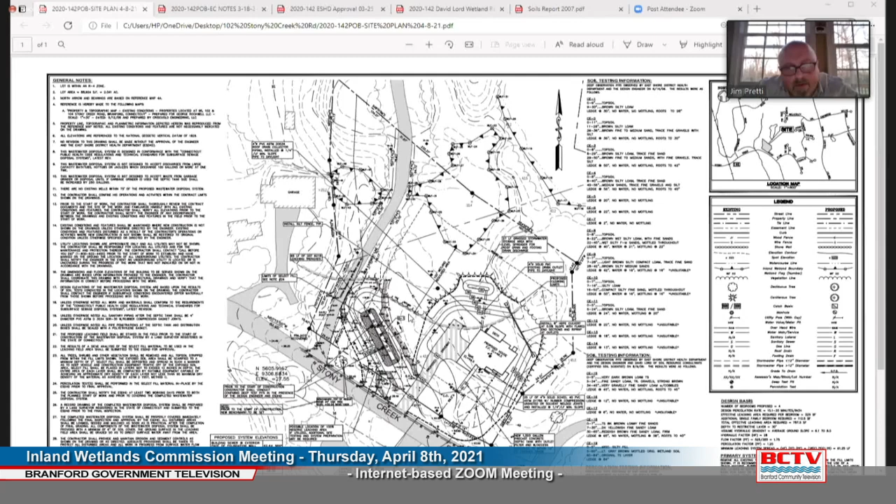The plan does show a stockpile topsoil area, a stormwater storage area with a level spreader for roof and footing drain discharge on the front of the house, basically on the other side of the ridge that goes through here.

We do have a septic tank and a leaching system for the proposed house, which has already been approved by East Shore Health Department at this point.

Jamie had emailed me that there had been a delineation on the neighboring property to the east, back in 2005, indicating there might have been wetlands in this area. That wasn't in our report from David Lord done years ago, so I had David go back out and check we didn't miss anything. I met him on site today, and we probed this whole area and found no indication of wetland soils there.

David was kind enough to jump on today. I saw him here a minute ago, and he could speak to this further if you wish, but we did double check and found no wetland soils in the area of the house. So that's where we are.

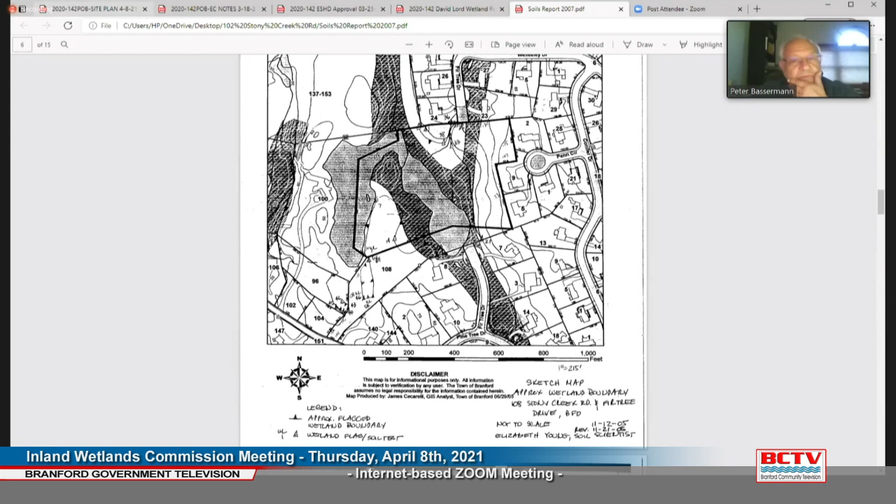Commissioner Bassermann: Where was the low-level area that you referred to? Right through here, I could show again on the site plan. On the site plan, please. Here it goes kind of right through the house. So because of the ledge, that's kind of both areas.

We're putting the house in between the ledge outcroppings to be able to get somewhat of a basement in there, and we're raising the house up because of the ledge and potential groundwater issues, so we're filling in between a little bit there. There was a comment from the town engineer about the possibility of ponding water over here because of our filling. I've indicated, just today, that we can add a culvert between the 2 lower areas, just to make sure anything possibly ponded up here can make its way around the house and back, eventually into this other lower wetland area.

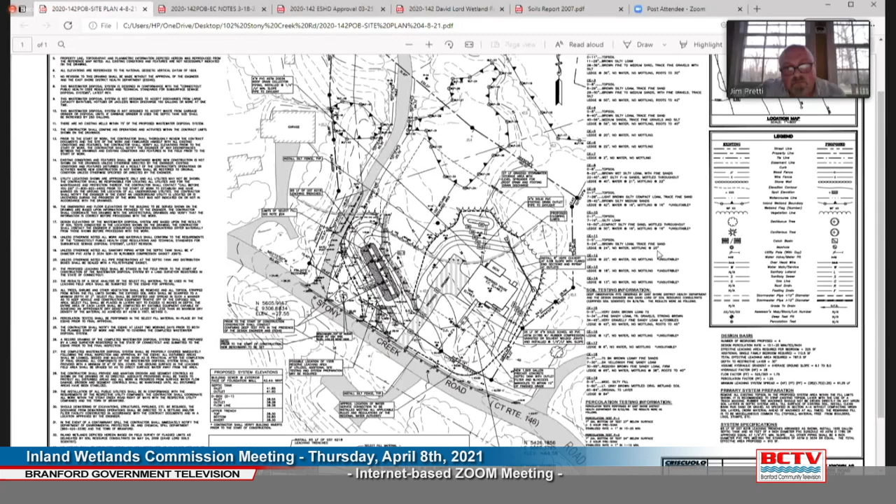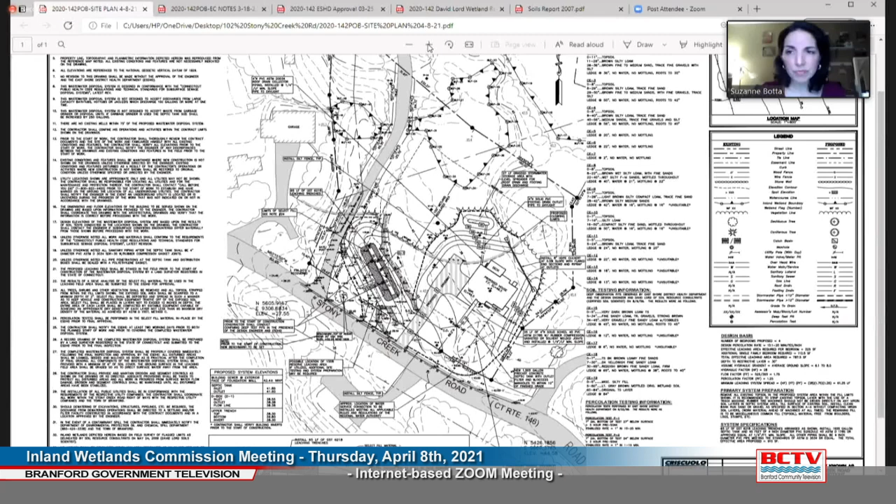Commissioner Botta: I just have a couple of questions for Mr. Pretti. It looks like the limit of disturbance is about 30 feet from the wetland flag, maybe flag 34 or so. Is that about 30 feet? Yes, I believe so. And what is the current degree of clearing on the property now?

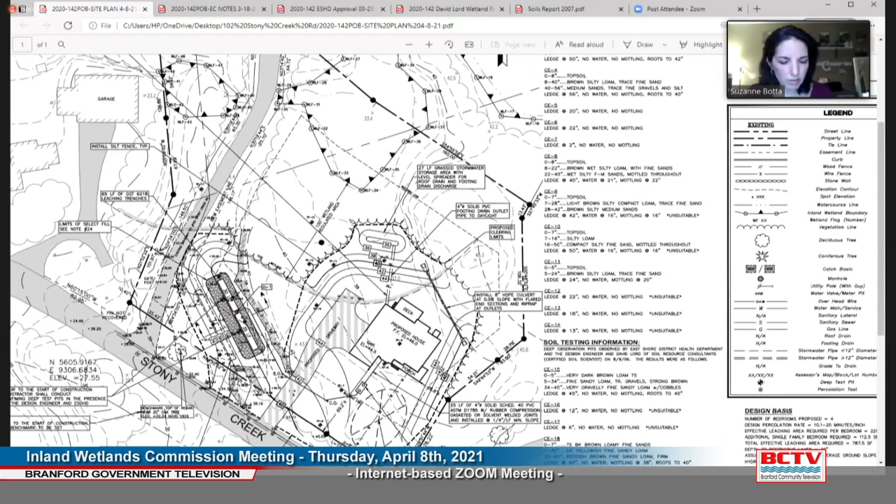The site is mostly wooded now. Although I will say, when David and I were out there today, the amount of dead and falling trees is tremendous. There seems to be some sort of termite or carpenter ant issue, with a lot of shredded stumps and down trees throughout this whole area.

Okay, so the site will need to be cleared. Is there much grading? Is there blasting? We're trying to do this without any blasting. That's why we've put the house in between the 2 ledge outcroppings, and we're filling up to the house.

So is there an intention, will you be stockpiling anywhere? They'll have to bring in material here. There won't be material to remove, they'll be bringing it and placing it as they go.

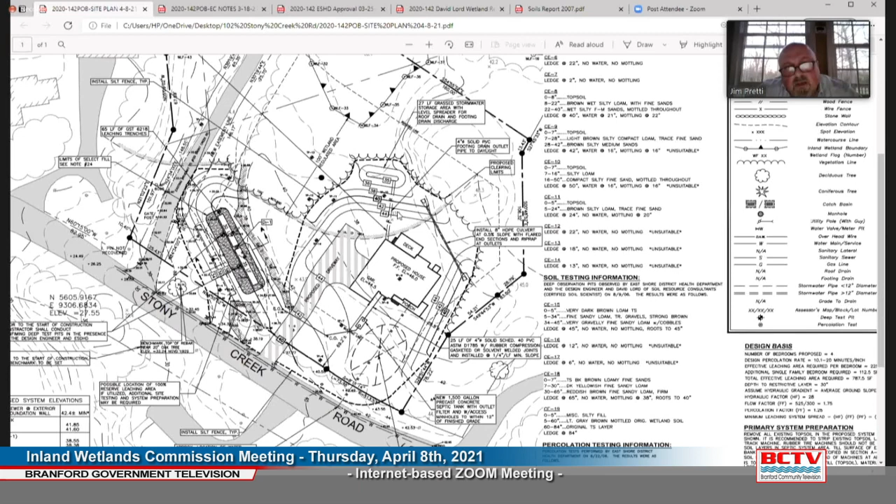And then, you talked about a potential concern, if they have a basement, is there potential need for a sump pump that's going to need to discharge? No, Jim Pretti again, this basement, just for round numbers, the footing drain around here will be roughly 37, and this outlet over here, the lip of this is at 36, it's a foot deep. So we could get out gravity wise without a pump, which seems to be a driving factor in Branford lately.

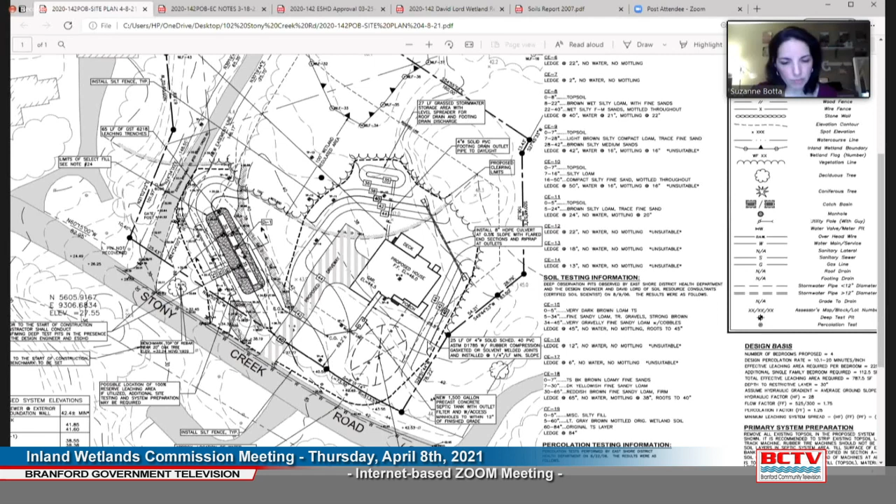Okay, and then what is this? The space behind is not a conservation area or anything like that, is it? It looks like, when you scaled out on the map, it looked like a larger wetland complex. This here is the edge of what was known as Vilmus Pond, and this was Marcus property that is quite large, actually. That's what this driveway goes to.

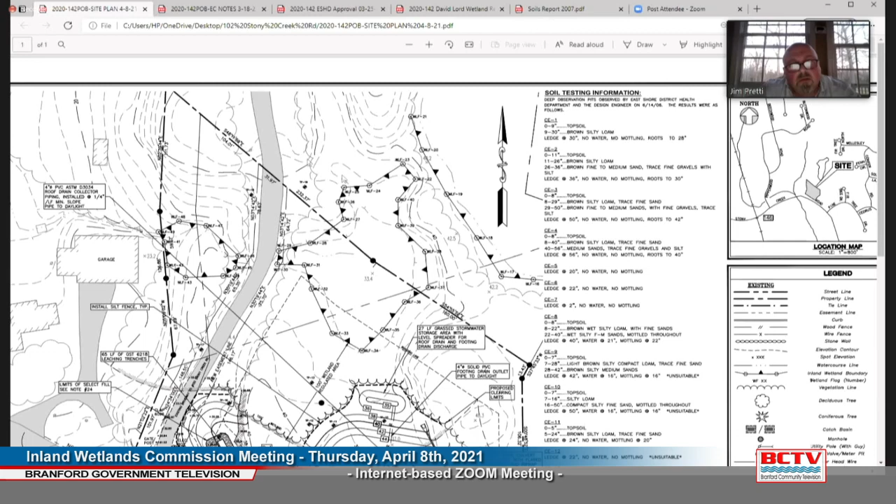So I'm wondering if it would be appropriate to put some markings at the limit of disturbance, indicating there shouldn't be clearing beyond that space. We know that creep is particularly common, and given that we're looking at 30 feet from the wetland, that would be an important feature to add. I could definitely say that I could make that call for the owner here, especially if we're talking about doing it around this side where the wetland is.

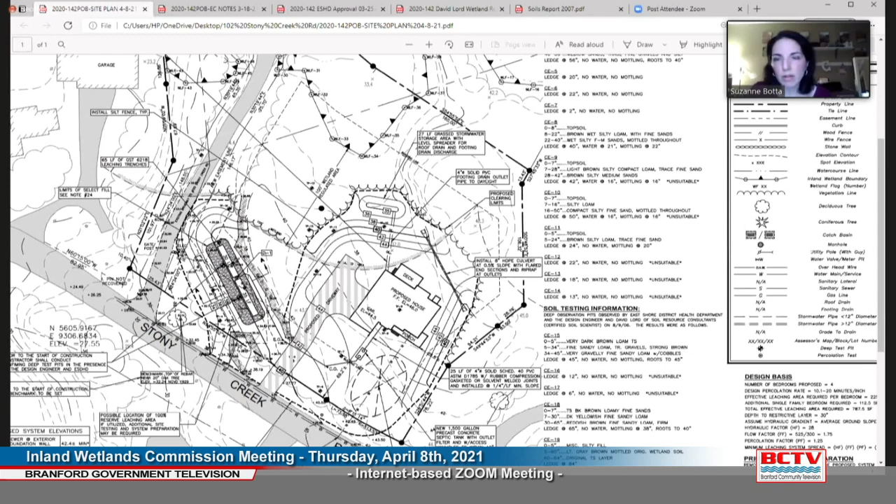I don't know that I could say we put them all the whole way here, but along this side. I agree, yeah, I think that's where we're looking at. Yes, the grass storage area, stormwater storage area. Yeah, with the level spreader, I think that would be an appropriate spot. It's close. Jim Pretti again, I think it's absolutely reasonable. Yes.

Jaymie Frederick, Wetland Agent.

I just wanted to add that in addition to the comment regarding the low spot, the town engineer also had a comment suggesting that the grass swale have some plantings due to the soil testing done on site and low infiltration levels. Just wanted to make the commission aware of that.

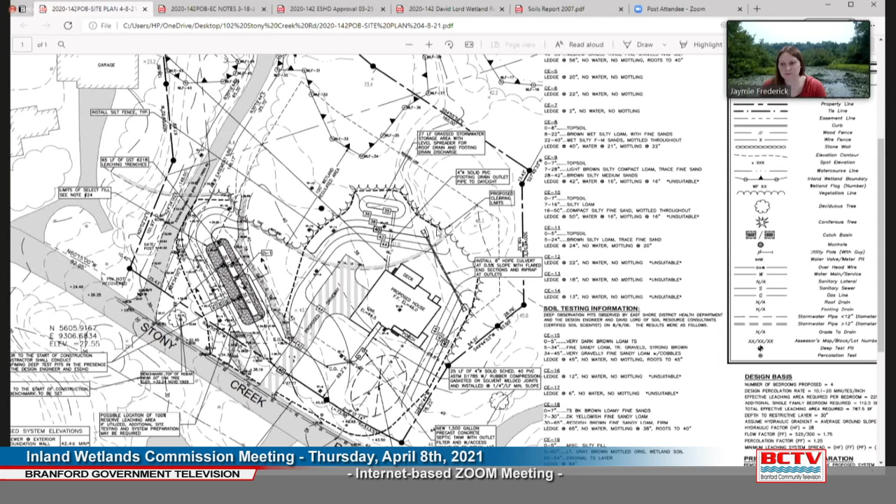Jim Pretti again. Jamie and I had a brief conversation about that today. What we could do is change this from a grass area to a rain garden. That would require excavating some of this material out and replacing it with a mix that has some compost in it, which will actually alleviate some of the infiltration constraints that the native soil has there right now. So we'd be willing to change that.

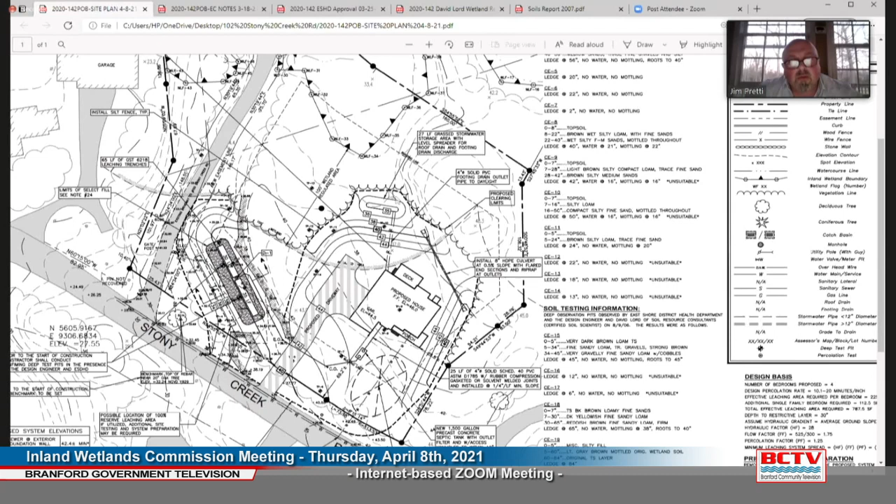Could you also include plantings? Yes, a planting plan. If we switch to a rain garden, it would obviously need to include plants.

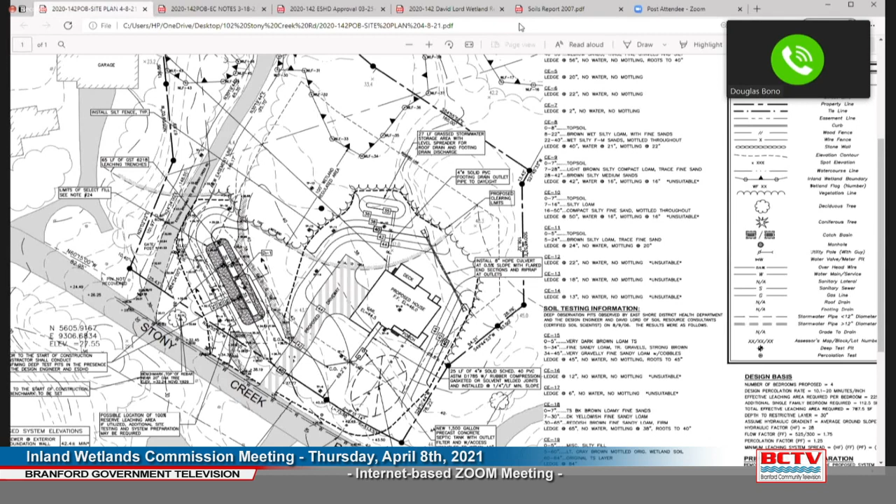So this is for receipt, right? We're in receipt right now. So then for next month, can you have the details on the rain garden and the plan for excavation—whether you're going to put stone underneath or whatever it is you're going to do—as well as any subsequent planting plan? Yes. Thank you.

Jim Pretti again. Is there any additional questions for David Lord? Because I'm not going to ask him to come back to the next meeting.

Jaymie Frederick, Wetland Agent. I do have a GIS map with both wetland delineations on it, if that would be helpful for the commission to view, to see if you have any further questions before the soil scientist is no longer available.

Commissioner Rose. So Jamie, I guess you're going to show us a map. To the extent that wetlands were identified in 2005, and our town records indicate the existence of wetlands, which I would assume would be that area to the right of number 104—is that the subject area that now turns out not to be wetland?

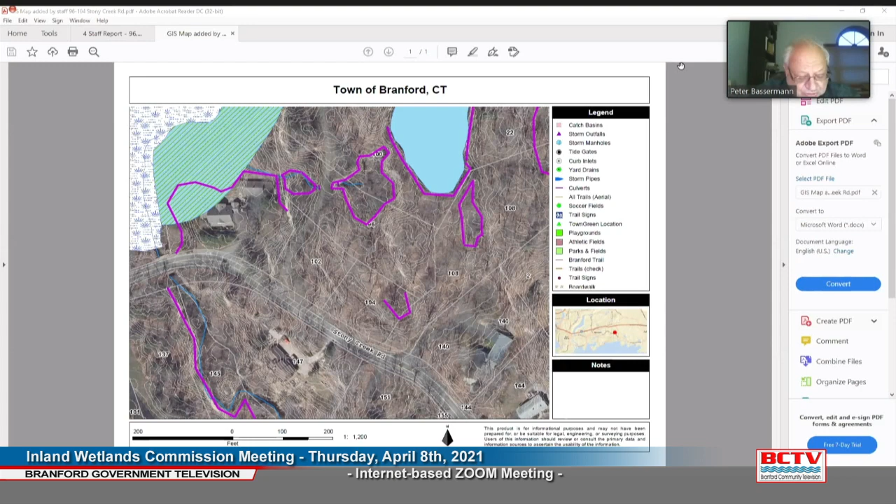Next up, we have an application for review, Inland Wetland 210302, 37 Bourbon Drive, construction of a new single-family home. Jamie, can you tee this up for us?

Sorry, Jaymie Frederick, wetland agent. I was distracted because there was a message in the chat. What were you asking? 37 Bourbon Drive. Can you frame this for us?

Jaymie Frederick, wetland agent. Are you looking at the latest agenda filed? Oh, I think I have 4.6. Should be a newer one, 4.8. Or 4.7, I'm sorry, 4.7. All right, did I miss something then?

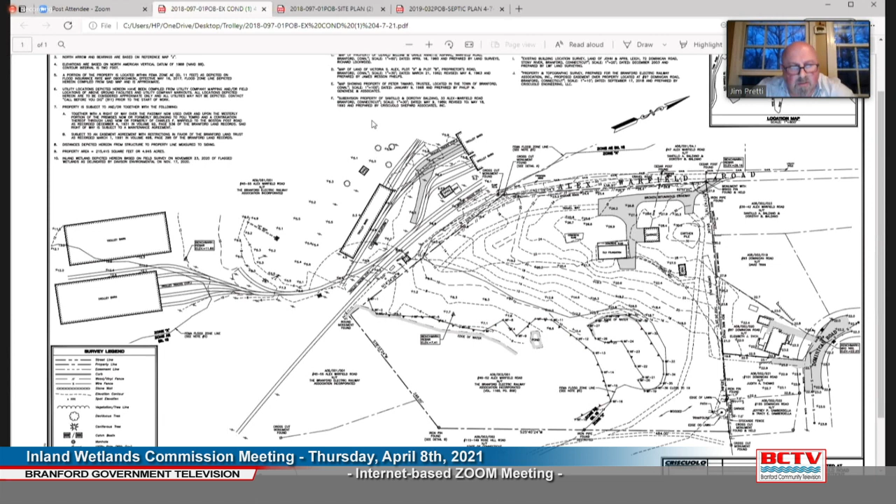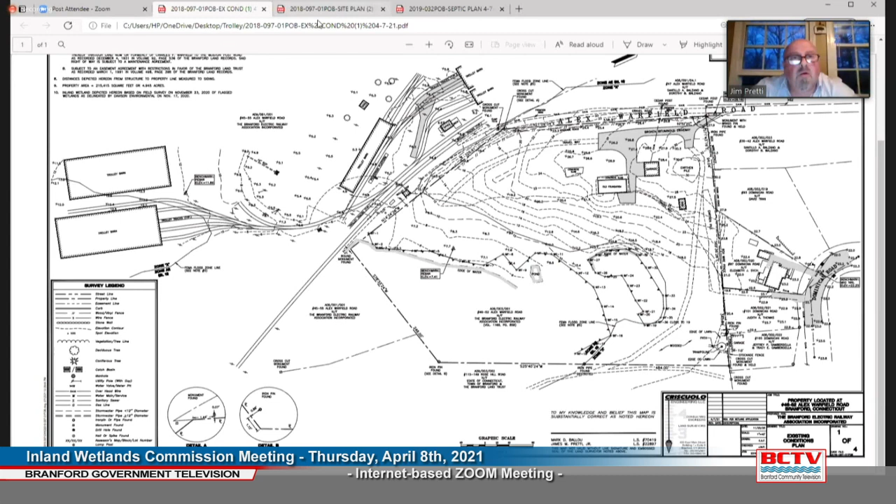But in any event, a number of years ago we put these buildings up for the trolley museum to store. This is kind of high ground over here, to store rail cars inside. They are now trying to get fire service into these buildings to protect them. They are going through a number of channels to fund that and get permission for it.

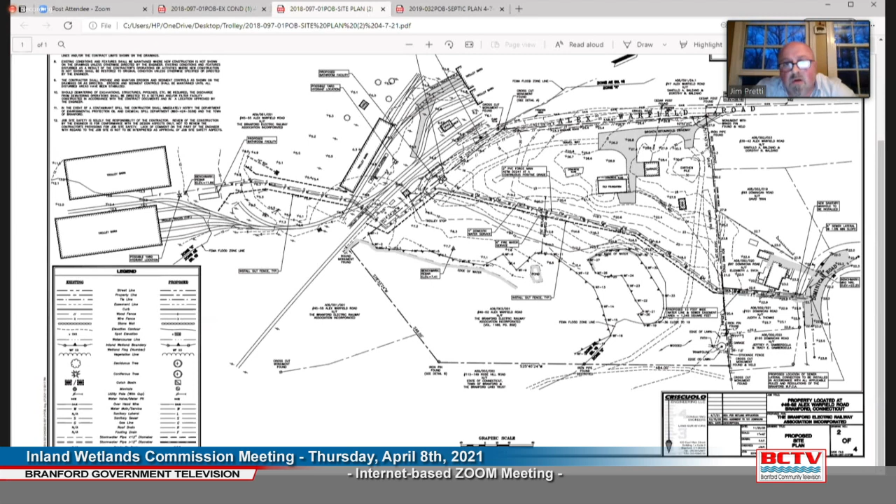But the end result is we need to come across this other lot from Dominican Road, which is over here. They have got an agreement to do an easement with these folks here. That is at 101. We're coming through across the field and then into the yard, going to provide 2 freestanding little bathroom buildings. One is here, one is here.

So there will be a fire and domestic service that comes from the road. And then the 2 bathrooms would actually gravity drain down into a pump station, and there would be a force main in the same trench that goes back out to the sewer in Dominican Road. So the majority of the work here is utility trenching, with the exception of the 2 bathrooms, which are actually elevated because of the flood zone. So they're going to be built on piers, kind of thing.

And that's basically the point of the whole project, is to get the fire, water, domestic water, and sewer services into the yard from Dominican Road.

This is Commissioner Bassermann, and Mr. Pretti: what's the distance between those 2 bathroom structures and the wetland?

So here you can see this dotted line is the 100-year, the 100-foot flood zone. So the bathroom and the pump station are out of it here, and we're out of it over here as well. It's just that some of this trenching gets a little bit close over here, but because of the elevations of the path that we took, we had to take them. Plus there are some other buildings here; this is other high ground, and if they ever need to put another storage area or anything, this is basically the only high spot they could do it in. So we're trying to leave that as it is for now, so they have that option in the future.

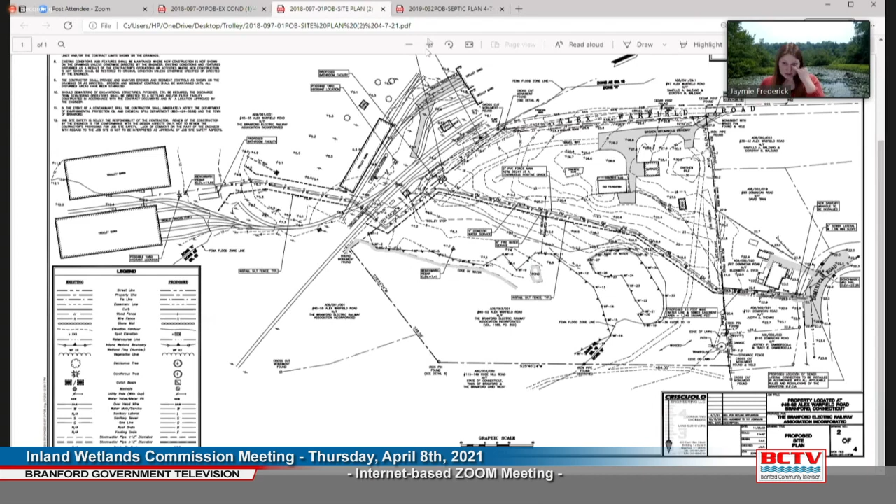Jaymie Frederick, Inland Wetland Agent. This application was received towards the end of the day yesterday, so I haven't had much time to look at it yet.

However, I was wondering, was a wetland investigation done on the property west of the access? Because we have some wetland delineations shown in our GIS that I don't think were shown on the map again, to the west, over here?

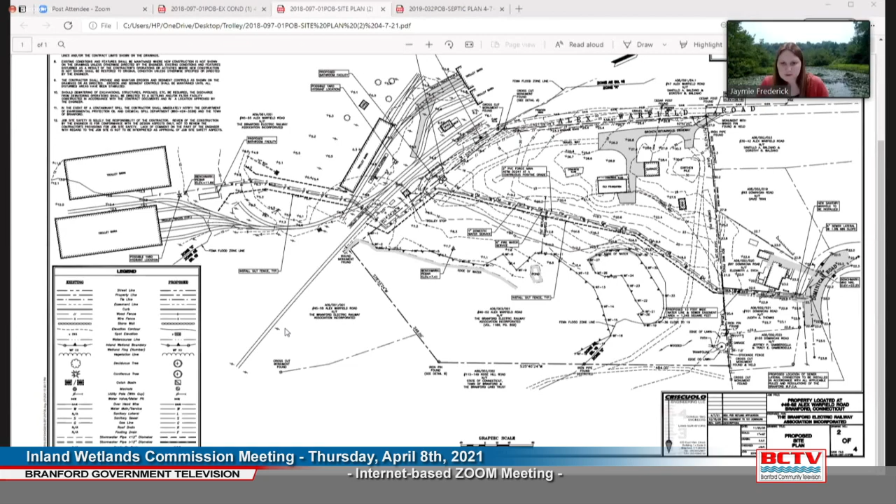Jaymie Frederick, Inland Wetland Agent. I believe kind of where the call out for install silt fence is, south, yeah, where your cursor is. I think in that area there might have been some, and then probably further west, north, probably off-site of the area shown, but I'm not entirely sure.

I just wanted to bring that to your attention to make sure that if there is something, it can get resolved before the next meeting.

Yeah, okay, I guess we'd have to have someone go back out. We had this flag just recently, within the last 6 months, so what you're looking at must be much older than that.

Jaymie Frederick, Wetland Agent. Yeah, I haven't had time to look in our files, but I can share with you what I'm talking about before the next meeting. That's fine. If you could send it to me, I'll either add it to the plan or have someone go look at it.

Any other questions for Mr. Pretti? Yeah, this is Commissioner Botta. So that pinch point earlier on with the trenching, how close is that to the wetland?

In this area here, is that what you're talking about? Yep, we're about 25 feet right there. This is a pretty large scale map.

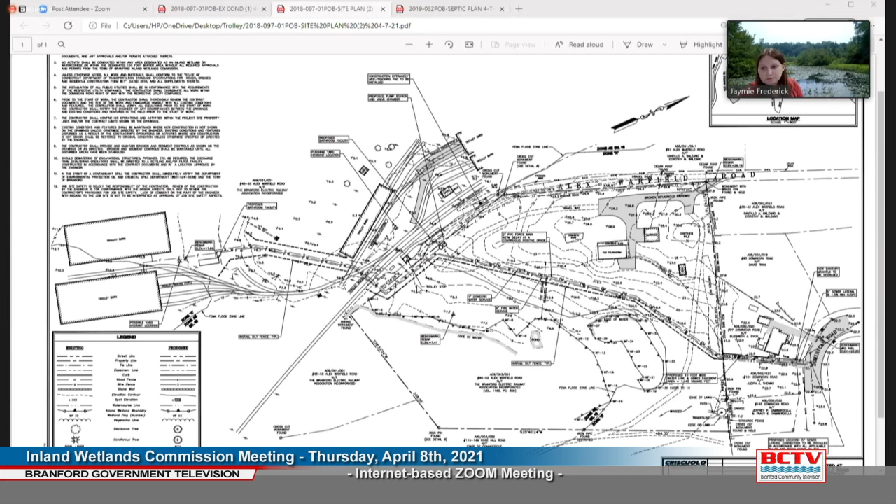Jim Pretti again. So yeah, Jaymie, I will arrange to have some stakes set, and then you and I could coordinate a meeting out there. Sounds good. Commissioner, I have just one more quick question.

The soil that will be removed for the trenching, is that going to be taken off site as it goes? Is it going to be stockpiled? Is this a day job? It will get piled up on, I guess, the west side of that trench, and then mostly put back in the same trench.

Now, there obviously will be some displacement because of the pipe and the sand bedding, so there will be some soil that will need to be removed from the site, but the majority of it will go back in the hole. Would you mark on this map where the stockpile would be placed?

Yeah, well generally, when they do trenching like this, they would kind of pile it as they go, so they could put it right back in, and then they'll need to come back later and take any excess away. So is that something that happens in a day or two?

This is probably only a couple days getting the pipe from one end to the other. All the work is really at the ends, the connections. But this is probably only a few days at most, 3 or 4, maybe 3 days, I would guess.

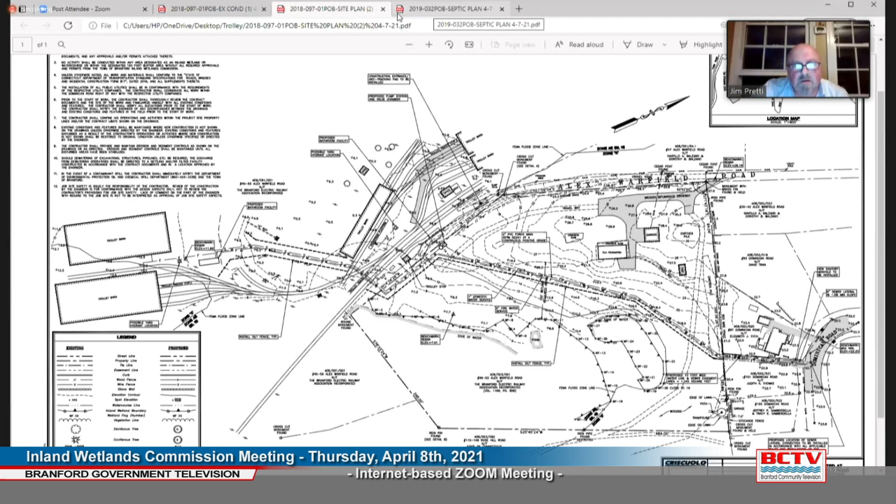It's actually in between the existing house and the garage. This is lawn area now. The wetland area is this channel. There's a culvert that comes under the road, and then there's a channel that's stone lined for most of this until it gets back to the stone wall. And then there's mostly pachysandra all along the edge here.

So it was obviously maintained by someone a long time ago. The person that owns this house, I believe, only bought it a few years ago, but they are having septic problems. It's not breaking out yet, but they have to get the tank pumped on a regular basis at this point. So these little garden areas that are here are going to come out, and they're going to excavate and put a new system in here, with a little filling.

That's the whole project. This is under East Shore review right now. We have not received the approval yet. Mr. Preddy, this is Commissioner Bassermann. Is the existing system in that same footprint?

Yes. So what happens right now is that the pipe actually comes out of the back of the house to a septic tank over here, and then the pipe goes under the deck, and then there's trenches that are here, but they're too low. They're in the groundwater table, and that's kind of common for the area. So this system will need to get raised up, but the material will get taken out, cleaned, septic sand will get put in.

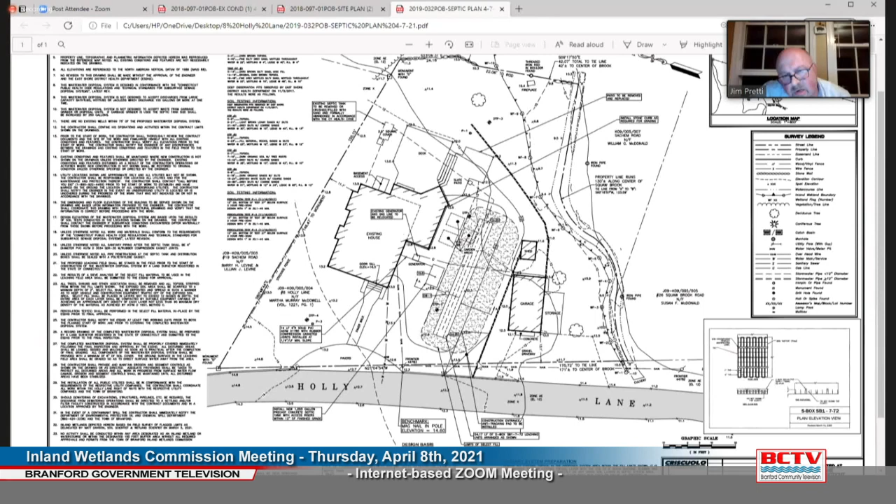But it could be moved over. This silt fence could be dragged down a little bit. There is plantings on the edge of the driveway, but we could pull it down a little bit and try to get just out of the system. But again, I can meet you out there. Martha's very nice, I'll call her and tell her we're coming, and you could walk the whole property.

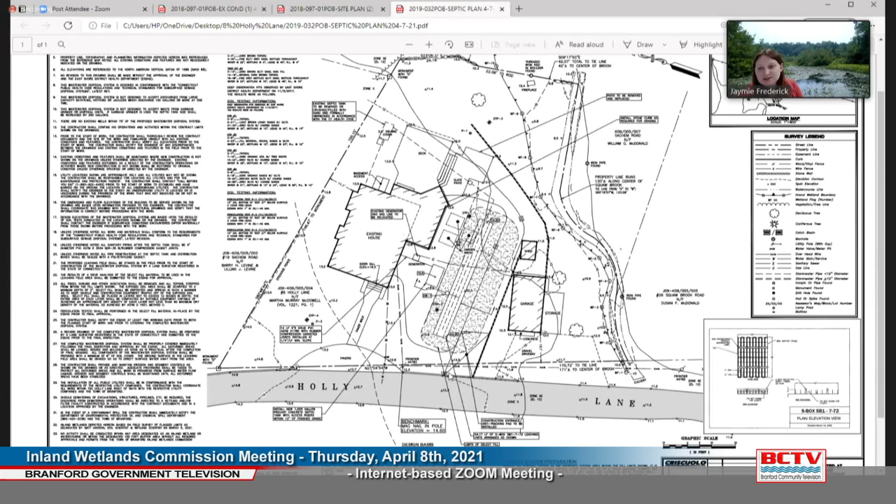Okay, sounds good. So, Jaymie Frederick, inland wetland agent, would the commission be okay with me doing this administratively if I'm comfortable doing so after the site visit? Correct. Commissioner Granold, I'm okay with it. Commissioner Botta, yes, please.

Okay, now we have an application for review, inland wetland 210302, 37 Bourbon Drive, construction of a new single-family home.

Jaymie Frederick, inland wetland agent. Just to recap before handing it over to the applicant: this application was received at the last meeting. The applicant was not present to make an initial presentation. However, the commission did briefly look at the plan and decided to schedule a site walk, which was held this past Saturday.

If the commission decides they want to hold a public hearing, tonight is the last meeting to make that decision. There has been public interest, particularly of note — I've heard that from neighbors on both sides, and I believe there are a couple people from the public present this evening. The commission shall not hold a public hearing unless they find that the activity is likely to have a significant impact, a petition is received, or the commission finds that it is in the public's best interest. So if the commission has any questions, let me know. Otherwise, that's all I have at the moment.

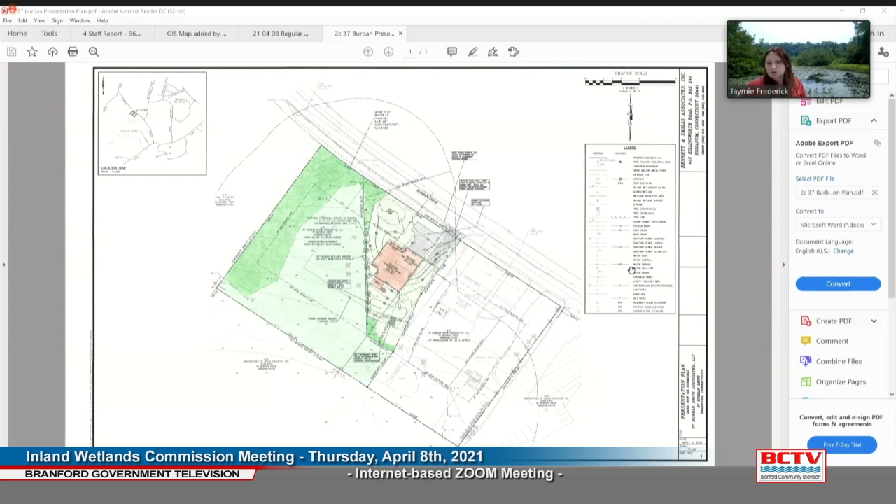Jaymie, you had a presentation plan — is it possible to put that up? Jaymie Frederick, the wetland agent: Yes, is this the one you're looking for? That's the one I'm looking for. Thank you very much.

To start off, this is somewhat a unique site in that this was an existing building lot that was approved in the early 1950s, before wetlands regulations were adopted in the town of Branford. After our client purchased the property, they asked us to go in and survey it and prepare a plot plan for the house. When we did that, we had a soil scientist come out and delineate the wetlands, and discovered that a large portion of the property contained wetland soil.

I'd like to give you a general description of the property. You see Burban Drive on the top of this sketch, running from west to east, and it slopes downhill from west to east, east being towards 41 Burban Drive. The topography from the road then slopes down to the south, to the back of the property. There's a fairly steep bank along the road and some guide rails at the top of the bank.

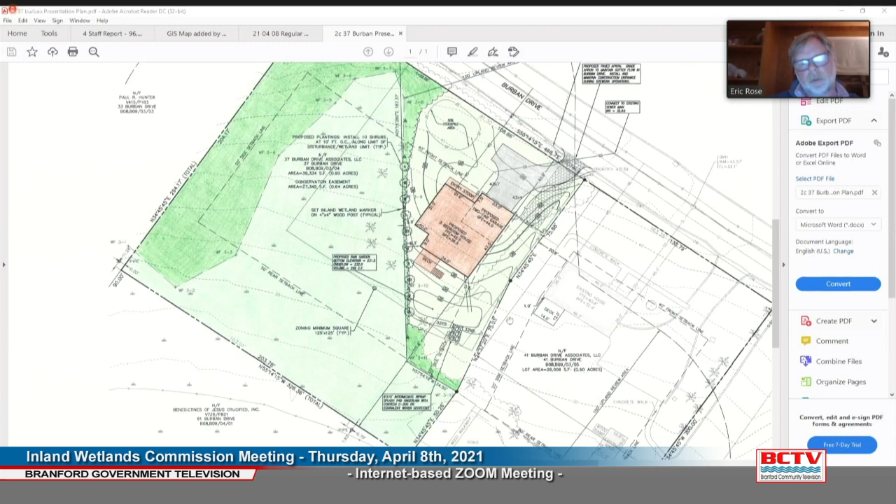This is Commissioner Rose. Can you describe again, I don't see the compass anywhere on here. What is north-south, for my description, one more time? We have north straight up. I got it. Okay.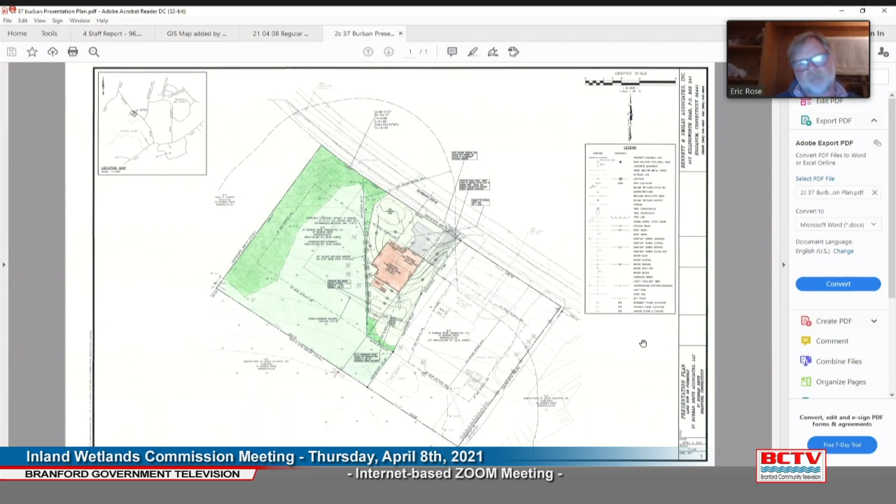So I think you previously described the original, what would be the east property line, as about midway into the garage, running parallel with the current setback line. Is that accurate? Yes, that would be accurate.

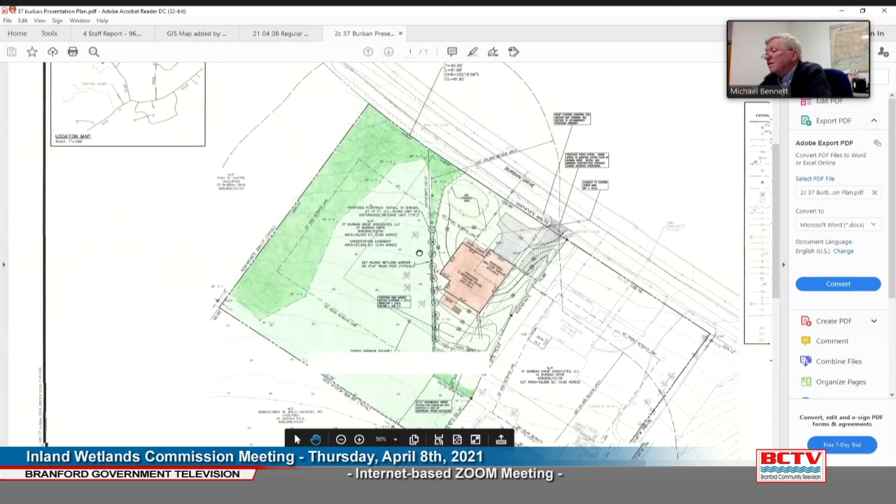Actually, if you see, we have a dimension, a rear yard dimension that goes from the rear corner of the house out to the property line. If you were to take... it's over by where the rain garden is. You have a 111.6 dimension on that line. Okay, yes, right.

So if again, let me call the side of the house the east side for clarity. If we took that line to the east side of the house and went to the property line, it's actually shown on that other plan before we made the lot line reduction, it would go into the garage and it would probably go through the number 44 in the garage. We have GFE for garage floor elevation at 44.

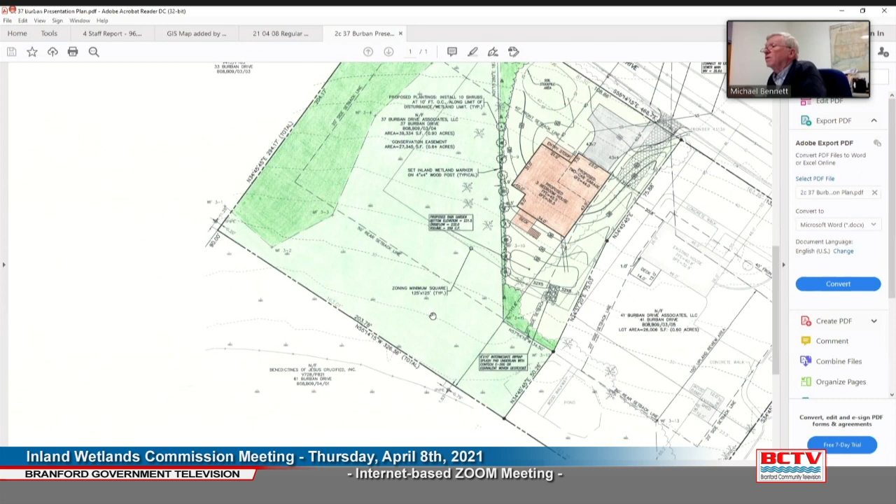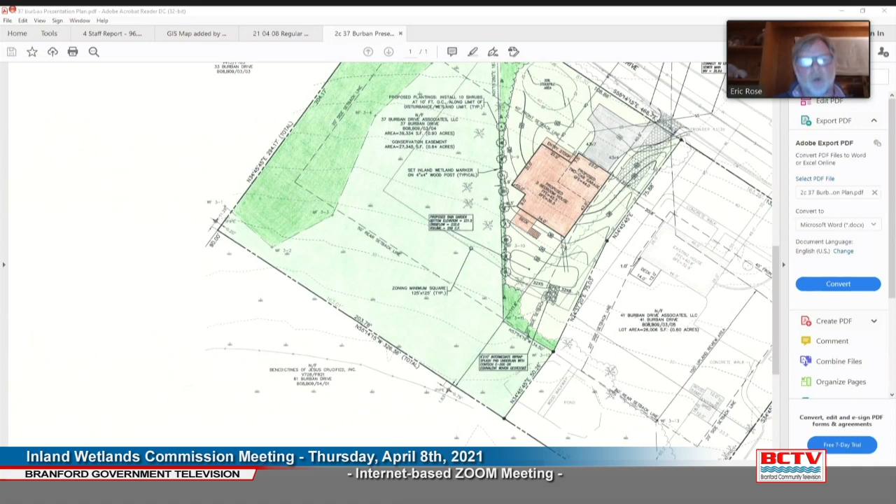That property line would have gone through that portion of the site, which would have given us no recourse at all but to disturb wetlands with any type of construction. If we go back in time prior to the lot line change, it is correct to say that in the context of the presence of wetlands, this isn't a buildable lot. There was no way to build a house on this property, given our wetland regulations and zoning requirements.

And what you've effectively done is bought sufficient property to have a little bit larger house and to create the east side yard setback. That's what the lot line adjustment enabled. And within that, you're able to fit a house that is almost touching wetland, but in the absence of the lot line change, this property never was buildable. Isn't that accurate?

I would say that it's not totally accurate from the standpoint that this was an approved building lot prior to the establishment of wetlands.

This is Commissioner Kraus. I have a question. When did your client purchase the property? Was it after the establishment of wetlands guidelines, or have they owned it since the 1950s? No, it was after.

Okay, so when they bought this lot, they knew that wetlands existed on this property, because all you need to do is go to town hall and look at the lot and know that this is not a good buildable lot. So you keep talking about it being a buildable lot. In 1950, when it was sold, it was a buildable lot. Today, it is not a buildable lot.

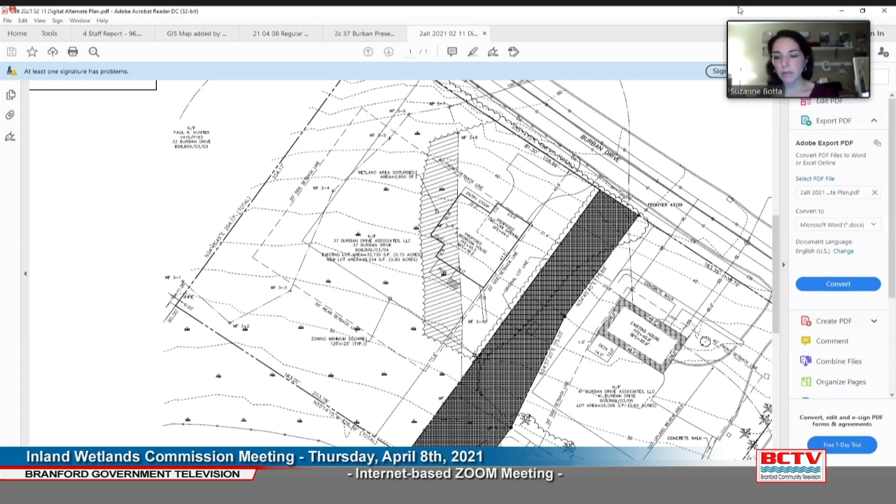Commissioner Bassett: Is there any commissioner who feels a public hearing would not be appropriate for this application? Okay, do we need a roll call vote for that, Jaymie, or is it sufficient to get general agreement? Commissioner Botta: I think we would need a vote, and I think someone should make a motion specifying the reasons we are calling the public hearing. And then there's an additional conversation I'd like to suggest following that. Jaymie Frederick, the Wetland Agent: I think the motion should also include the date, and the next regularly scheduled meeting is May 13th.

Commissioner Botta: My understanding was the rationale for the public hearing was the likely significant impact to the wetland during the construction process, as well as the public interest, since we've had requests for input from the public. Those are the two reasons. Or do I make the motion? Commissioner Granholz: I agree with specifically the first reason, but the second one would also be appropriate.

Okay, hold on, I need a second. Is there a second on that motion? I didn't make a motion yet. Sorry, I'm just looking for... okay, I got it. Okay, so I will make a motion that the commission hold a public hearing for inland wetland application 21.03.02, 37 Burban Drive, under section 9.1 of the Branford regulations, and that the commission is holding the public hearing first due to the likely impact to wetlands during the construction process, as well as public interest that has been expressed to the Wetlands Office, and that the date for the hearing be set to begin May 13th, 2021.

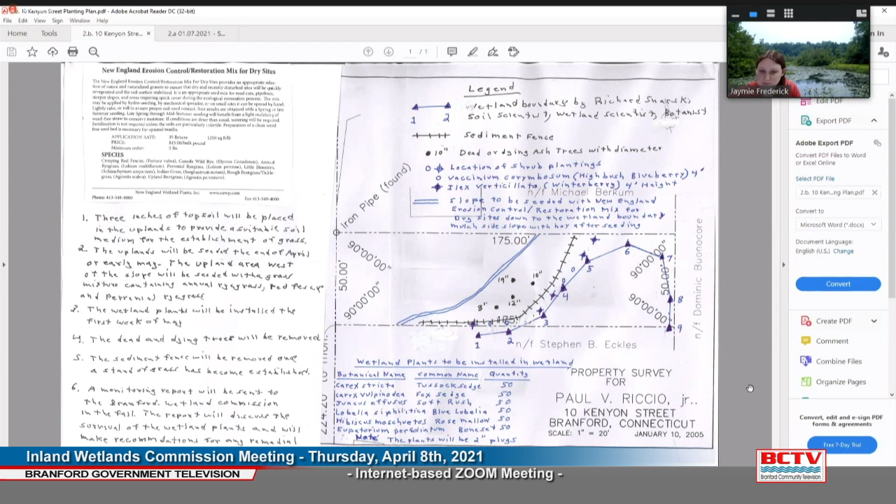Is everybody good with it? Yes. All right, hold on. So I will make a motion to accept the plan for cease and correct 20.12.02, 10 Kenyon Street, and that the plan should also be amended to note that we should receive reports for 3 growing seasons, with a rate of 85% survivability, in order to satisfy the cease and correct.

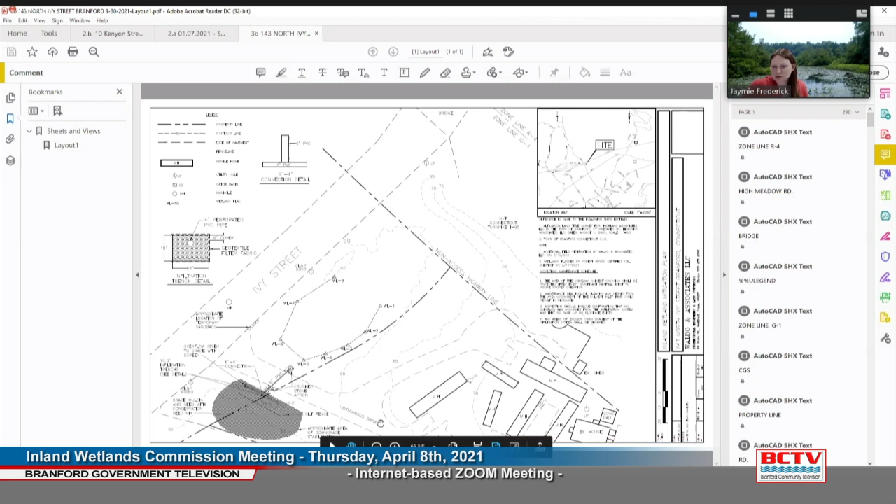Can everyone see the site plan? Yes, yes. Looking real quick to see.

Jaymie Frederick, the Wetland Agent. Is Robert Sonicson on the call? I am. Okay.

One of the things I noted during one of the rain events is that some of the water contributing to the issue was coming from Ivy Street. So they placed some sandbags along there, there's a broken bit of curb here. I'm not sure how effective it's been since I haven't been back to the site. But this is the plan they have to solve any drainage issues from on-site sources. I know the town is looking to do some curb repair to help with any town drainage that might be adding to the problem.

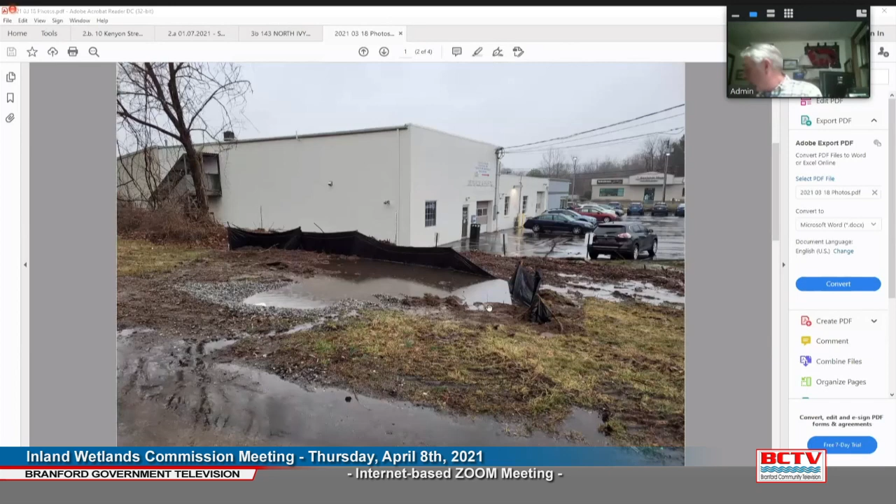The other thing we're proposing is regrading the area down gradient of the culvert. There's some question about who it was, but there was some brush cut down in that area. It is on the applicant or the owners of 143 North Ivy Street's property, but they weren't aware, they hadn't authorized that clearing to be done. In any event, they're going to restabilize the area. There's a large tree that was cut down, but

once the infiltration system is in, it will be easy enough to grade that area off and seed it with a conservation mix I specified, which is a mixture of fescues and Kentucky bluegrass, a good low-maintenance option. In any event, this yard area where their sign is will be mowed periodically.

I also included, at the request of the town engineer, an inspection and maintenance schedule. There is staff at the facility that does maintenance work, and they will be keeping a monitoring eye on what's going on with this system.

So the design we came up with will neither dewater the wetland, nor will it back up water to flood out the wetland. So the hydrology of that wetland system will continue to function in its natural manner. I think this plan meets the goal of stabilizing the area and the site. And I think that is it for the plan.

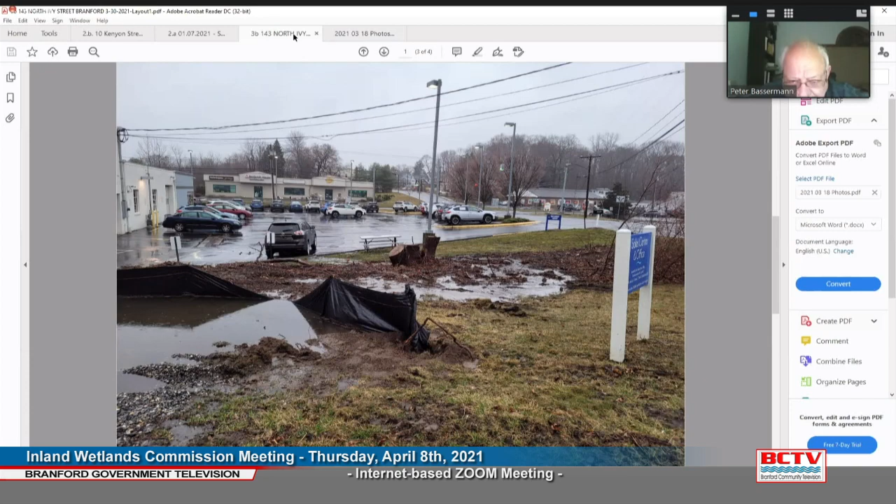This is Commissioner Bassermann, thank you. Is the plan including this property that we're looking at on the screen in the hands of staff? Jaymie Frederick, the Wetland Agent — I'm not sure I follow the question. Well, we talked about activity to be done at this particular location, where is it?

Jaymie Frederick, the Wetland Agent: the grade, mulch, and seed activities are shown on the site plan. Correct. One comment I would have is that there's some area that's been disturbed over here from the street drainage coming in, so this area should also be reseeded and stabilized as well. Agreed, that certainly makes sense.

I was really focused on the downstream side, but there is gullying on the upstream side from the street drainage coming in. The owner would, once the street drainage stops, have no reason they can't stabilize that area. Until it does, there's no real way of stabilizing it. But I understand the town is looking to have some curbing work done, hopefully by the end of April.

Jaymie Frederick, the Wetland Agent: yeah, that's my understanding, either end of April or May. I know it's on their list of projects to do once they get the green light. Hopefully the sandbags will keep it stable. They'll do a pretty good job in the short term, but that curb really does need to be extended in that area to keep the water running down the gutter.

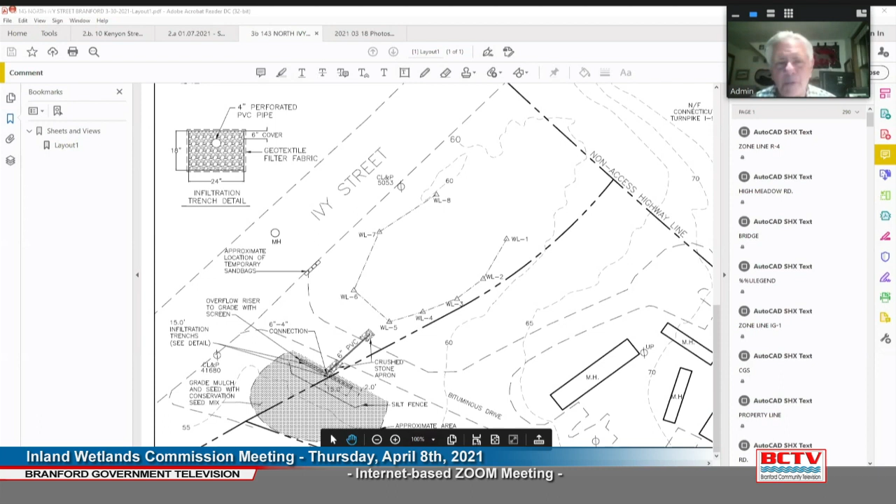That's right, Eric. There's the amount of water coming off of North Ivy Street onto the area where the inlet of this culvert is. There's really no way this property owner could handle all of that street drainage coming onto their property. But with that street drainage taken care of, the system we've designed is going to work very well, and everything will be stabilized, and there won't be any drainage flowing down into the corner of the Subaru parking lot where there's a catch basin.

Jaymie Frederick, the wetland agent: all of this water that you can see in this picture is coming from the street. So that will be very difficult to stabilize until that's resolved, which is why they've put some sandbags out there, which I think I may have a picture of. I'm showing these pictures, they're older. I just feel like with the rain, it shows the drainage issues occurring out on site.

I thought the video was great. The sandbags are located right there at the entrance to this driveway, and when those sandbags are in place, the drainage continues to run down Ivy. There they are. Sorry? Yeah, there they are.

Okay, that was where it was coming off the street and running down into the inlet area of the culvert. So hopefully that'll take care of it, or at least significantly diminish the amount of water coming off of Ivy Street onto the property.

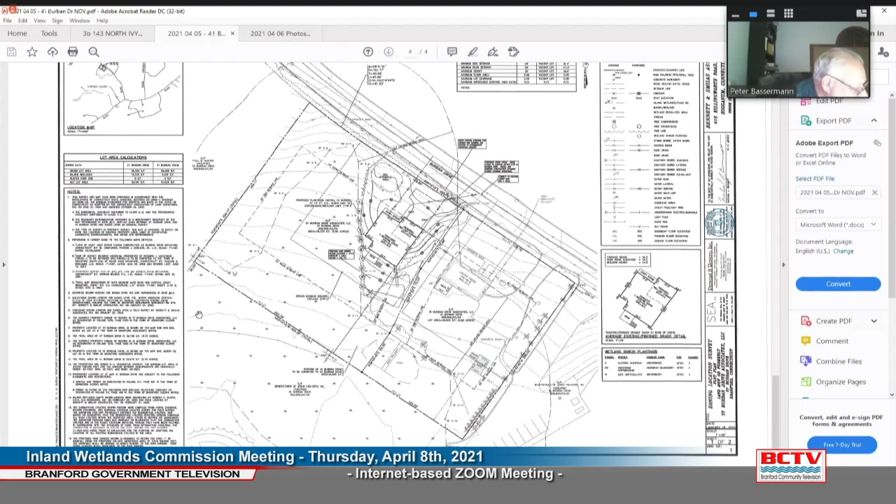This is Commissioner Bassermann. Does the property owner wish to address why the trees were removed, the number of trees removed, and what his thinking is regarding mitigation?

Is the property owner on the call? Jaymie Frederick, inland wetland agent: he is, but he's on mute. Okay. Can you hear me now? Yes, yes. Okay, good. This is Doug Bono.

Yes, I took the trees down because there were bugs and a danger to the house of coming down, but I had no idea of the new property line.

There were a number of trees taken down, correct? Yes, they were all in danger, they could take the house down. The one on the corner - I have pictures - it was halfway already headed to the ground. It was infested with bugs and everything, and it would have taken down the corner of the house, which is now the other property line, which I didn't know.

Jaymie Frederick, inland wetland agent: How many trees were removed overall? There's the 3 down by the pond, and then one in the corner of the house. Were the 3 by the pond a danger to the house? Oh yes, they were over 150 feet, overgrown, and half of the tops were broken off too. There's still some in the back that you can see that are broken off.

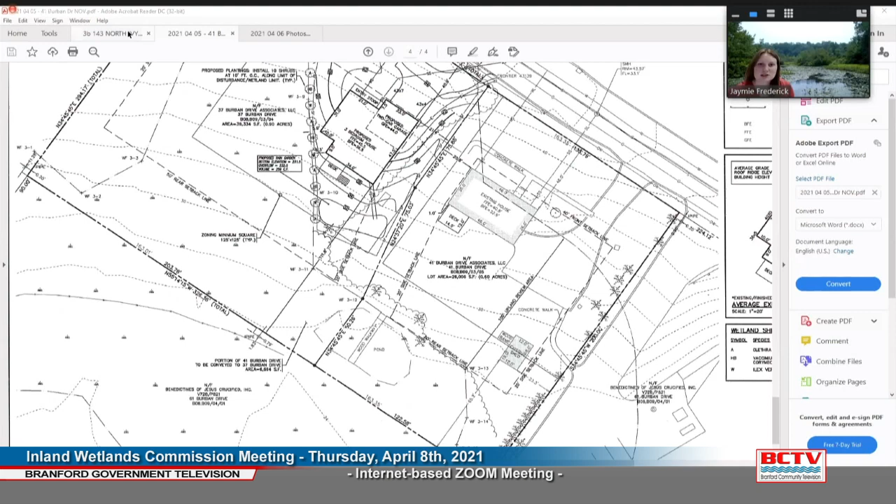The area I'm specifically concerned about is not so much near your house, but down by the pond wetland where there were 3 significant trees. I see, that's where you want the plantings. Yeah, the stuff by the house is not of consequence. Jaymie Frederick, wetland agent: in the notice of violation I sent, there was a picture included, and I believe it shows the area that would be of concern. Yeah, okay, I understand, so adjacent to the wetland edge is where the commission would be looking for the planting plan.

I understand, one thing I don't understand is that I have to plant, I took a few trees down and now I got to plant a few more. But next door, they're considering taking down the entire forest to put up a house. It just seems very unusual, you know what I mean? I have to put up 3 because I took down 3 that were a danger to my house and family, but next door they're going to take down the entire forest to put up a house, and that's okay?

Mr. Bono, because there's a public hearing that's been ordered, we cannot discuss that property outside of the public hearing. We don't have to have a conversation about it, but I do have a valid point though, I could express my opinion, I mean if it's a hearing or not. Well, we can't take anything you're saying about the property into consideration.

Okay, that's okay, I will plant the trees down by the pond. I thought you meant by the other part, the new property line. Okay, I see where you mean, so then I don't have to wait. I have no problem with that, I'll get some green.

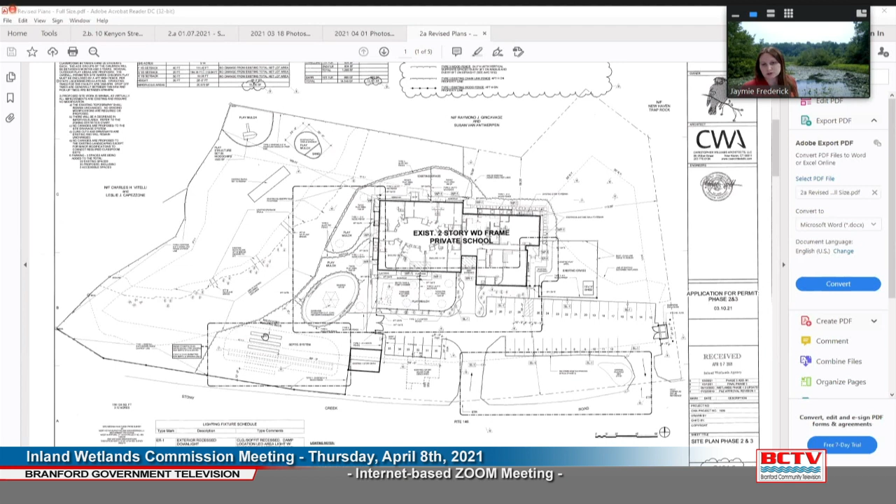Jaymie Frederick, inland wetland agent: the most recent application the commission received was for a septic repair, which has been approved. As part of that, they are looking to relocate their raised planting beds slightly closer to the wetland boundary. And then on the side of the building, they've got some play areas. I don't know if you guys can see that or if it's too small.

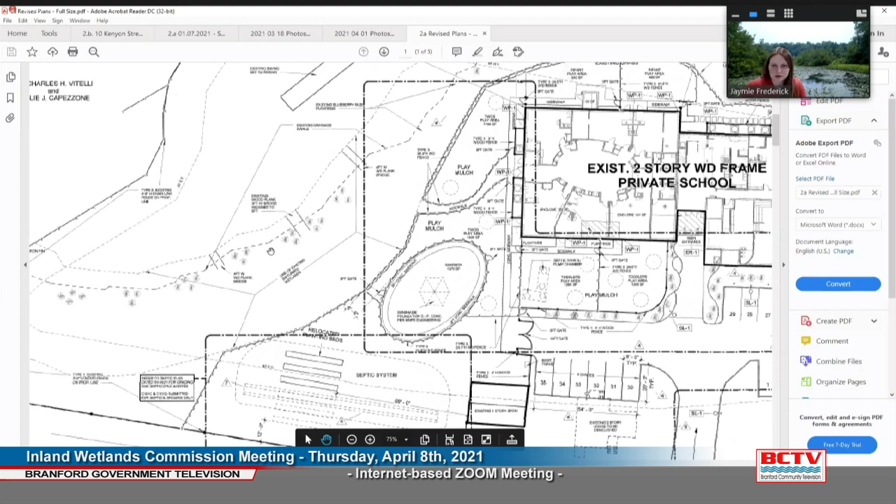Do we know what the nature of the planting beds are? What material is going in there? Jaymie Frederick, inland wetland agent: I am not sure, but perhaps Leigh Small knows.

Hi everybody, I'm Leigh Small. My wife and I own the daycare facility, the Nest at Shoreline Campus. We do have a landscape plan done by Van Wilgens Landscaping. The plantings are various trees and shrubs around the building. The plantings out by the actual stream bed were already done, approved, and installed per the last approval. So everything we're planning on doing now is actually back behind the wetland delineation lines, and the nature of what's going into those planting areas has not changed.

Jaymie Frederick, inland wetland agent, for clarification: Chairman Basserman, are you asking about the raised planting beds close to the wetlands? Leigh Small: I think he's talking about the raised planting beds by the septic system. Yes, those are raised planting beds set back closer to the road. There were 3 of them, just as there are now, built out of 2x12 lumber stacked on top of each other. We were just moving those out of the new approved septic repair area, closer to and away from the road.

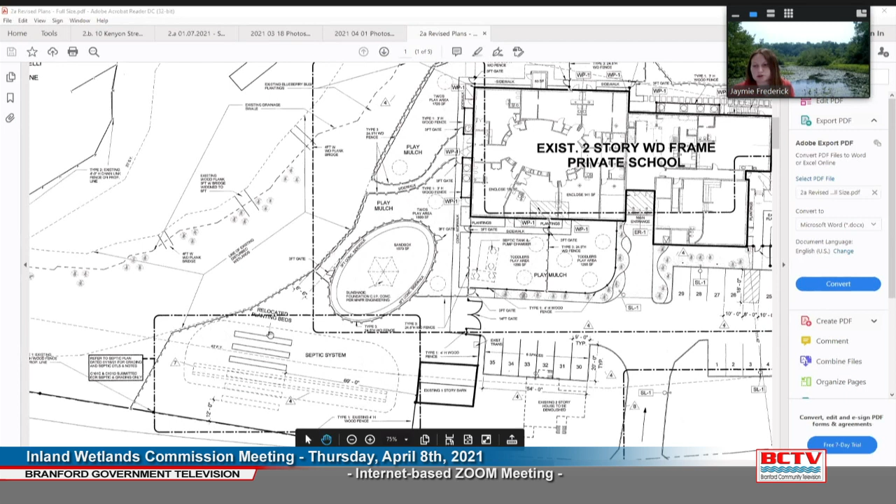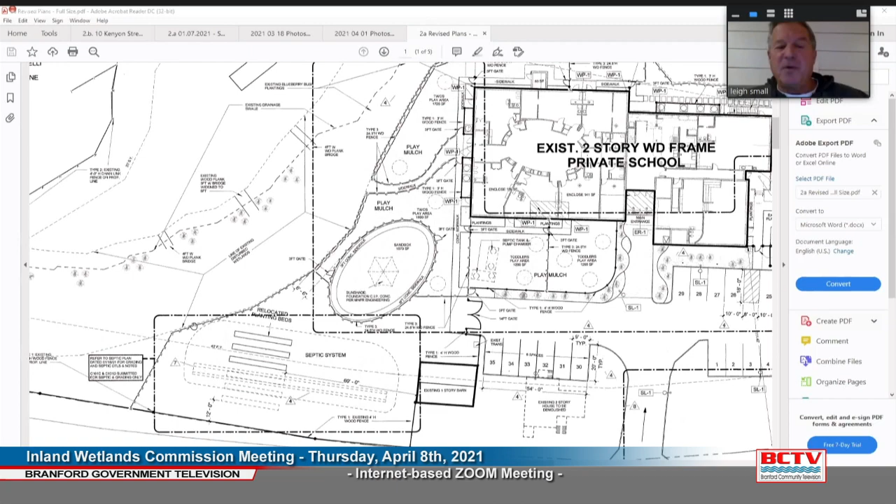Jaymie Frederick, inland wetland agent, recapping for the commission: they're within the area of disturbance for the regrading for the septic system, so it's already slated for disturbance. I think your question was what goes in those — those are vegetable gardens for the children to plant and learn about gardening. They will be fertilized? No, we don't use any fertilization in those.

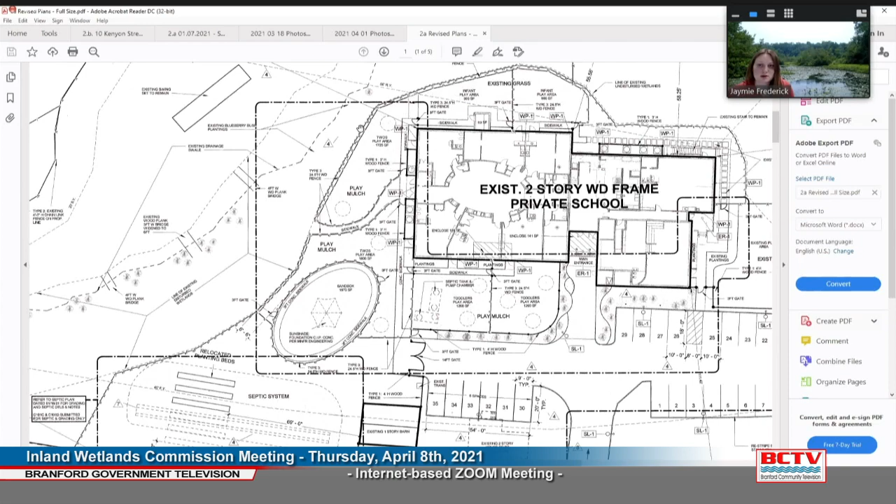Jaymie Frederick, inland wetland agent: they are proposing a silt fence around the activity that is to occur, and they are looking to fence in the play areas that run adjacent to the wetland edge, and place a sandbox with a concrete sidewalk around it, plus another sidewalk from the building over to the wetland edge to access the play areas on the other side.

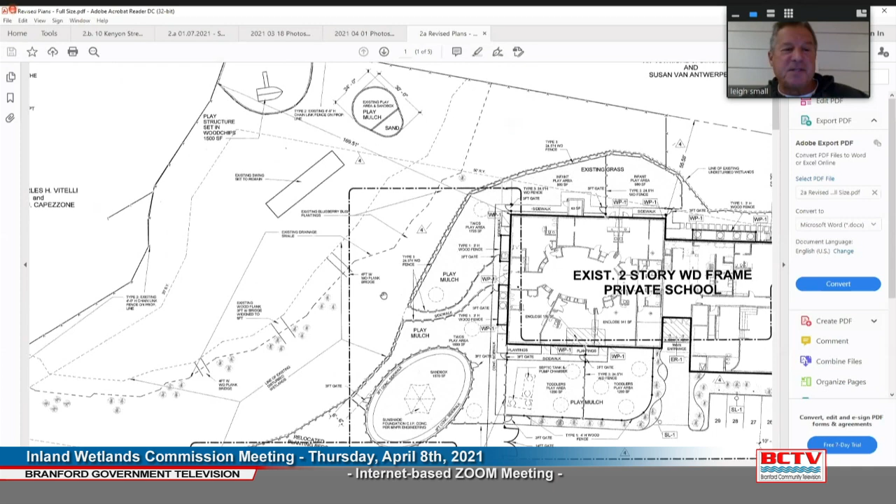Commissioner Kraus: the play areas on the other side of the wetlands already exist, correct? Leigh Small: The only one we're adding is a play structure up in the northwest corner, with a mulch bed. Kraus: I see all the kids out playing and didn't know if all of those were still there. Leigh Small: Yeah, the swing set is here, the sandbox is here, and we were going to add one up in the corner. Okay, thank you.

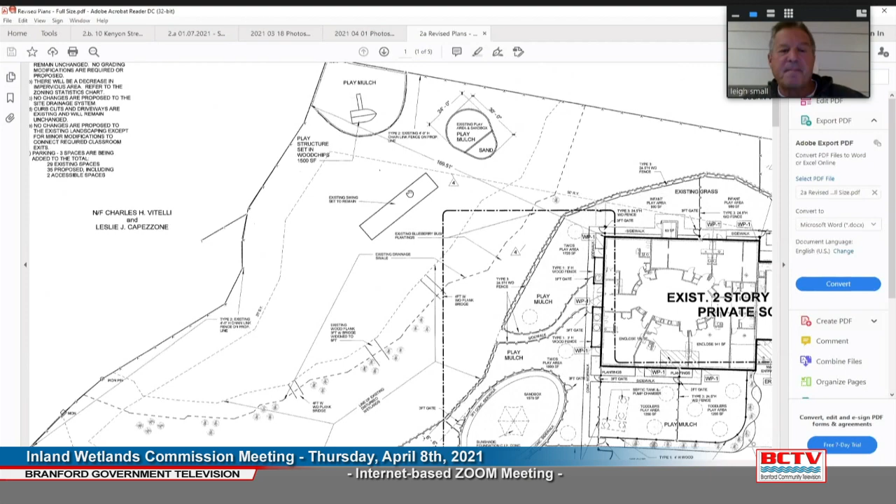These circles are some plantings. I believe they're river birch clumps of some sort. There is a planting plan which I can pull up to confirm what they are, but I believe they're a native type planting.

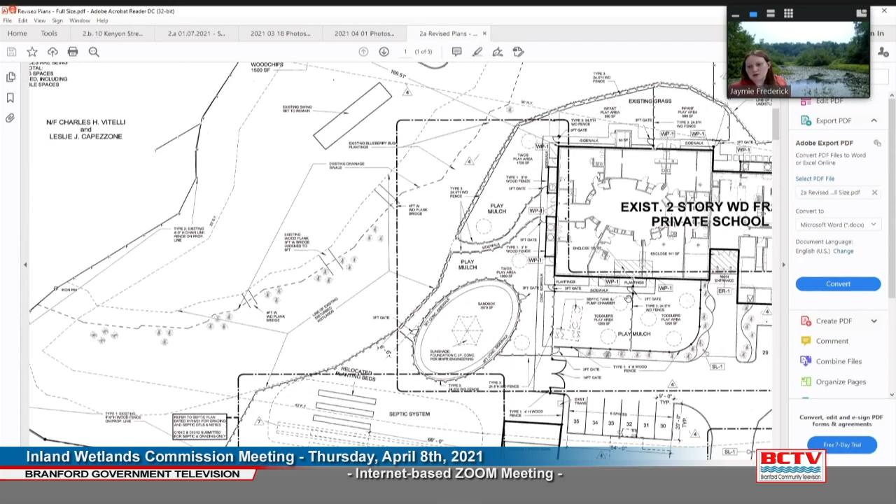In the back of the building it's pretty much the same as far as the play areas and the fences around those play areas. This is where the bump out is being modified slightly, as I mentioned earlier. There are also some minor modifications to the parking lot layout, but nothing significant and nothing that I think would be of impact to the wetland.

I think the main areas of concern would be the fencing of the play areas right up to the edge of the wetland, and the installation of the walkways and the associated play areas.

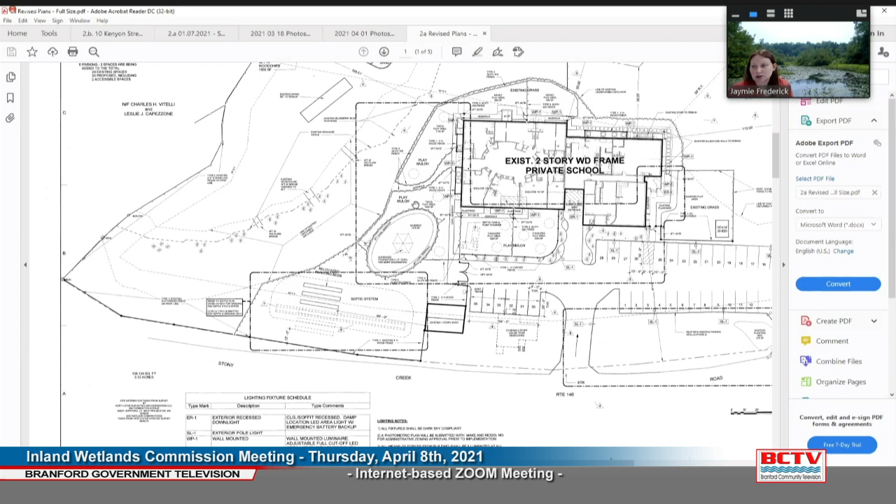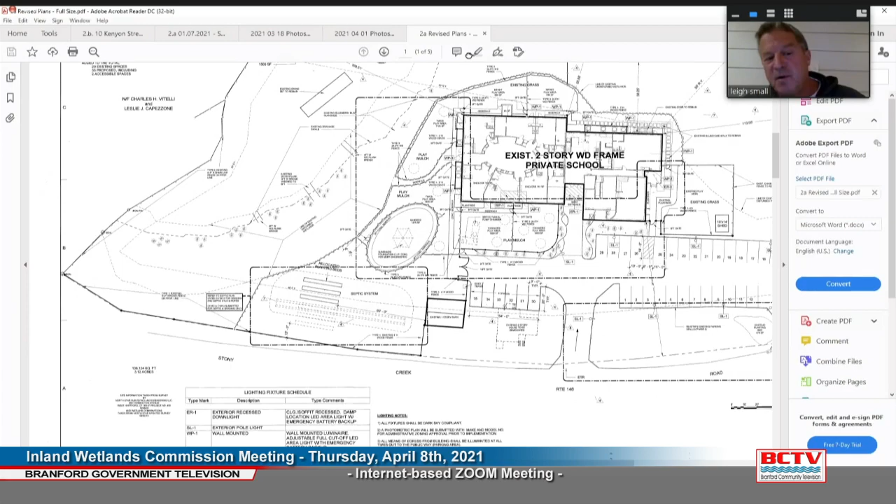Commissioner Bassermann, what's the nature of the fencing? The fencing is just about a 2-foot high wood post with a 5/4 by 6 on edge horizontally. We actually have one that was approved by the commission, or by Jaymie, and it now exists where this sand structure is going to be. So it's going to be a similar fence to what we already have there. It's just a 4x4 wood post.

Commissioner Bassermann, again, the installation of the post for the fence would be how? Put in the ground, by hand. By hand, no machines. Okay.

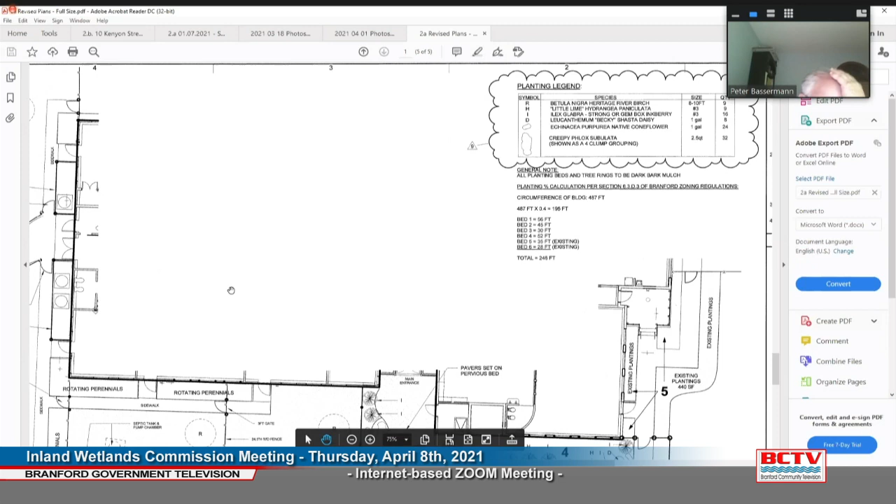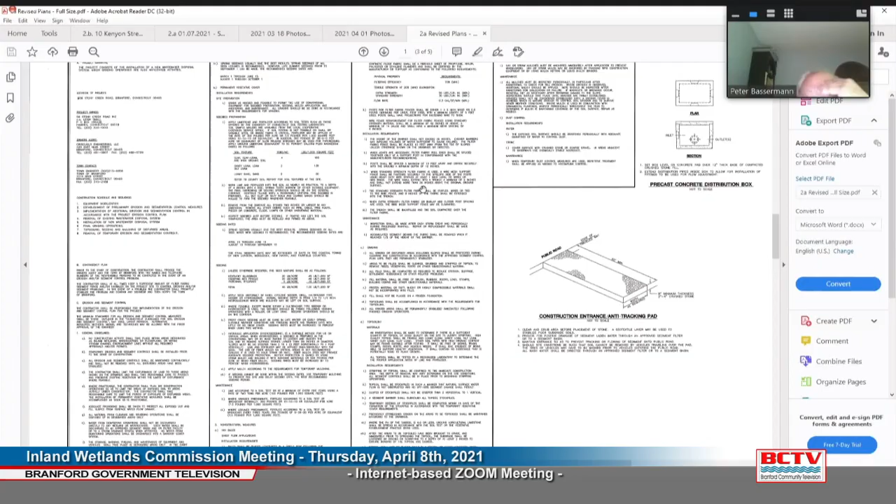Jaymie, I think as Commissioner Bassermann, you started out with reviewing this with the commission, but I don't know that I see any reason why this can't be an agent approval, unless you tell me that somehow because it's a modification the commission needs to act. Jaymie Frederick, wetland agent: because it's a modification, the commission can act, and I think because it was a commission permit and it is so close to wetland, it would be appropriate for the commission to make the decision. But because it's a modification, it's actionable tonight if the commission is satisfied with the information provided. I know the permit holder is looking to move forward with planning and zoning as soon as he can, so I'm sure he'd appreciate it if the commission would be comfortable making a decision.

Commissioner Masterman: the plan looks reasonable to me. Commissioner Kraus: I'm good. If that was a motion, I would second it. Jaymie Frederick, wetland agent: before we go too far, I think it should be a motion. Yeah.

Commissioner Bassermann: I make a motion that the permit modification request for Inland Wetland 190704, 56 Stony Creek Road, be approved. Commissioner Kraus: I second it. Any further discussion? All in favor? Aye. Any opposed? Okay, thank you very much. Have a good night. Good night.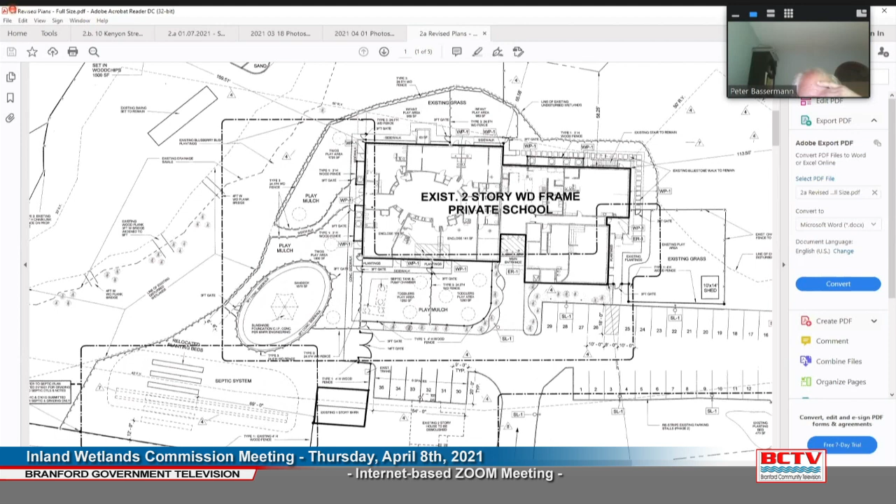Next up, Tisko Elementary School, 118 Damascus Road, a temporary tent.

Jaymie Frederick, wetland agent: recently, building applications have been submitted for some temporary tents at various schools throughout town in response to COVID. In particular, at 118 Damascus Road, also known as Tisko Elementary School, the outdoor tent is primarily looking to be used for outdoor lunches when the weather allows. The tent is located in a place where a wetland has historically been delineated.

Back in 2004, a neighboring property was developed, and it came to the commission's attention that some grading that did not comply with the approved site plan had occurred at some point. It was estimated that activity had occurred in the 1990s. There was some talk about creating a remediation plan, but nothing came of it, and there's been no discussion that I could find since 2004.

So let me pull up a GIS map to show you the location. Was the non-compliant grading done as part of the school construction on the school property? It's not clear, it seems probable, but there's no record of when it happened, just that it doesn't comply with what the approved site plan was. So the sticky point for me signing off on the tent is the fact that it's in this area that's never been resolved as to how it should be treated regarding wetland regulation.

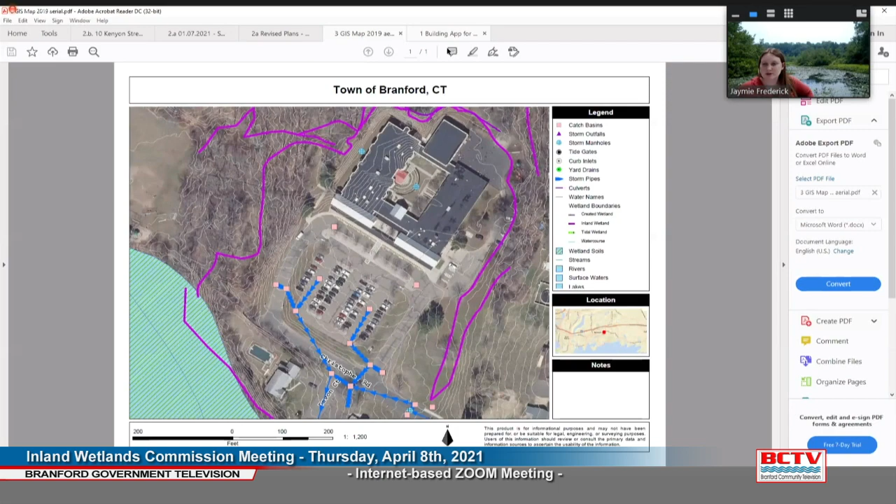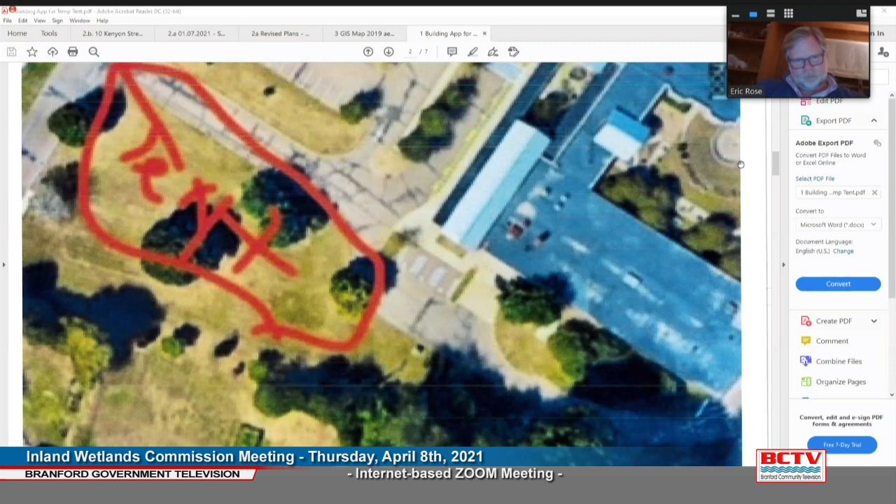So Jamie, is the condition of the wetland, you say, no longer probably wetland soils because of the regrading? Jaymie Frederick, the wetland agent: that's correct. Because of the grading activity that occurred, I do not believe that there are wetland soils there at this time anymore.

In 2004, the previous inland wetland agent had taken some notes, and she also agreed that her assessment was that it was no longer wetlands in this area. However, back in 2004, the commission had some discussion regarding seeking remediation. Now, 17 years later from that point, without any follow-up, and with that being an estimated 20 years after the activity occurred, I'm not sure the commission should pursue that. I think it would be kind of sticky to try and look for remediation at this point.

Commissioner Bassermann: I'm not heading down the remediation road, but the only thing that comes to mind is on a town-owned property, we probably ought to have a good record of whether there's wetlands and where they are on the property or not. And to the extent that we think something has changed, I guess we need to make an evaluation, either through some informal means or a formal means. But I don't like the fact that on town property we have this conflict.